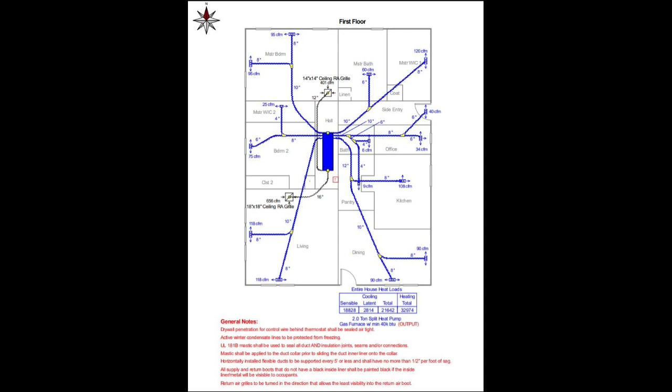Alright, so the third guy just left after talking a little while, and we'll see how it goes. He again agreed with the second one that this duct work was too much, it wouldn't get any flow, and the size was wrong. So let me bring you back to this.

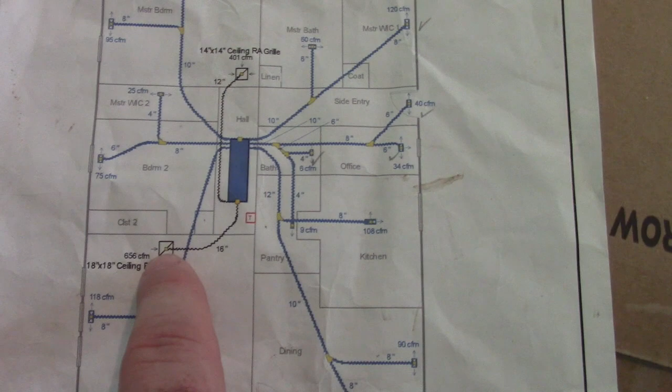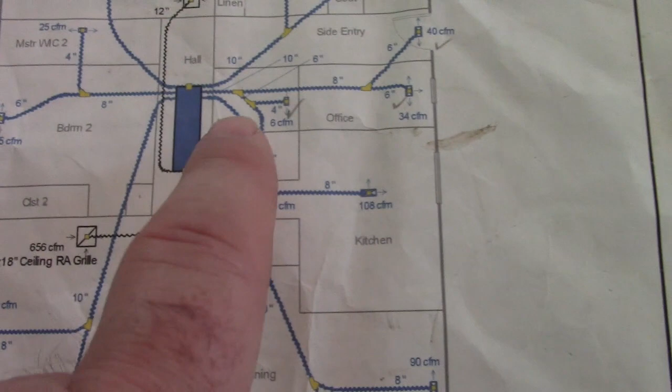Basically this is the layout of the house. I know you can't really see good through this camera, but this is the unit, the heat pump, the air handler. On one side here we have the return, so there's 2 returns, one here and one here. This one I actually moved to the hallway, so it's closer there, and this is going to be center of the house. Then it's got ducts going to every room.

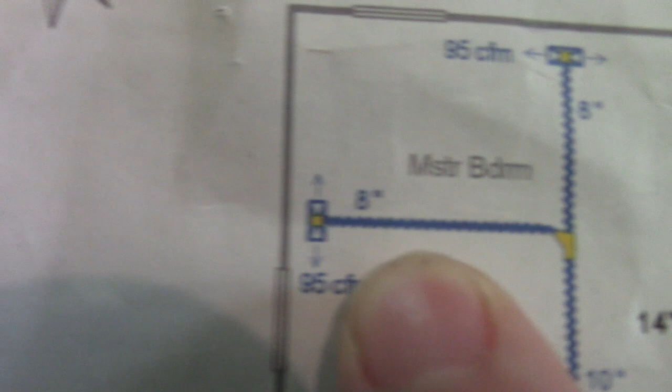And he said these ducts are way too big. This is an 8-inch duct going to a 4-inch, going to a 6-inch. Here's a 10-inch going to two 8-inch. It's got the CFMs right there, 95 CFMs, 95 CFMs, 120 CFMs here.

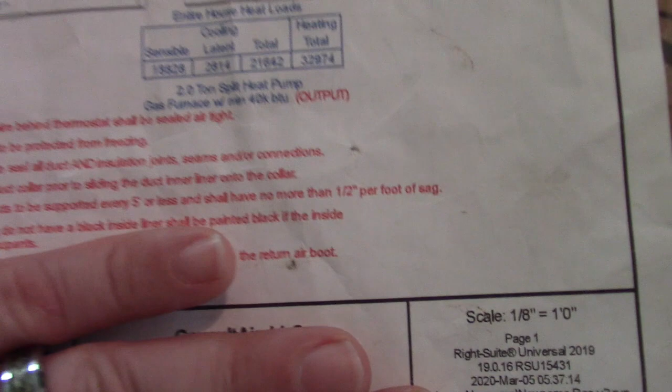The problem is, that's what it's rated for, a 2 ton split heat pump, gas furnace. We decided not to go with the gas furnace. The problem is the 2 ton heat pump only puts out 800 CFMs.

These 8-inch, 10-inch lines, the 8-inch I think is 200 CFMs, the 10-inch is probably 300, whatever. It all adds up to a lot more CFMs than what that heat pump can put out. So you really won't feel any airflow when it's running. I'm guessing you're only going to get so much airflow out, and it's going to suck up so much. You get some flow, but with these tall ceilings, you'd never feel it.

So he thinks at least a 2.5 ton for this house. I want to say this house is 1,600 square feet. I don't think it's on here.

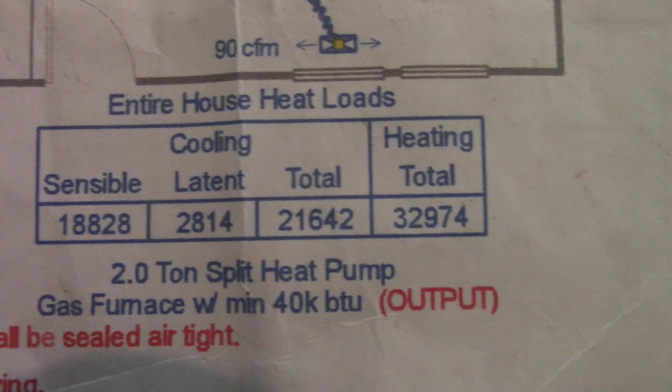There's the heat loads right there, entire house heat loads. Sensible, latent, cooling and heating total 32,000 BTUs, 21,000 cooling and 32,000 BTUs heating. That's the heat loads and the cool loads. So a 2 ton unit is 24,000 BTUs, and you see here a 40,000 BTU minimum furnace would be needed to take care of that heat load.

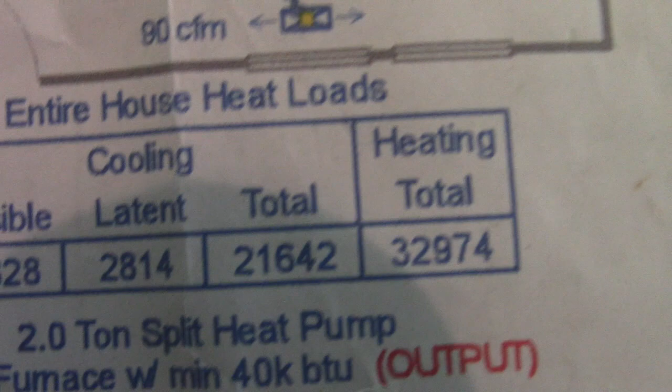I'm not an expert on heating and air. I know these guys, and I asked this last one - I'm not gonna name names because he hasn't got back with me, but he's gonna get back with me in a day or so with a price. I'm not naming any names of whoever I go with.

These guys don't even bother calculating the heating load or cooling load. They've done this stuff so many years - he's been doing it since '77 or '78, and mostly in this area, in the south. He said he used to do all that, but once you do it a thousand times, you figure out, hey, I need this or that for this size house with this much insulation. Typically in the south we oversize our HVAC units, especially the cooling, because we have a lot of humidity down here, not necessarily hot temperatures.

It makes it very hot. If you're dealing with an average of 85 degrees in the summertime, but 75 to 80% humidity, that's a lot of heat. You've got to get that out of the air to cool it off.

So anyway, that's what we're going to do, I guess. We'll see who we go with, A, B, or C. I still haven't made up my mind. I'm thinking it's probably going to be B at this point, because I'm kind of afraid this guy is going to be a little bit on the high side, but we'll see.

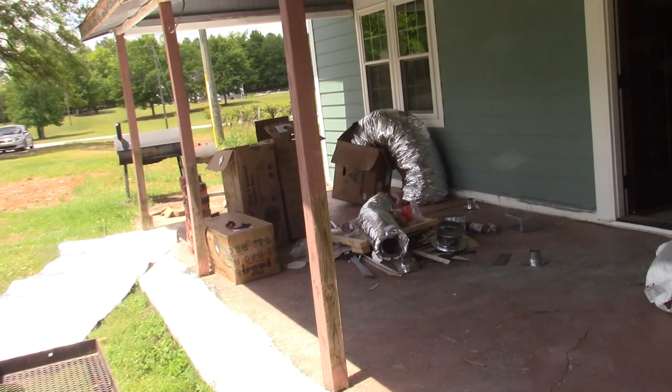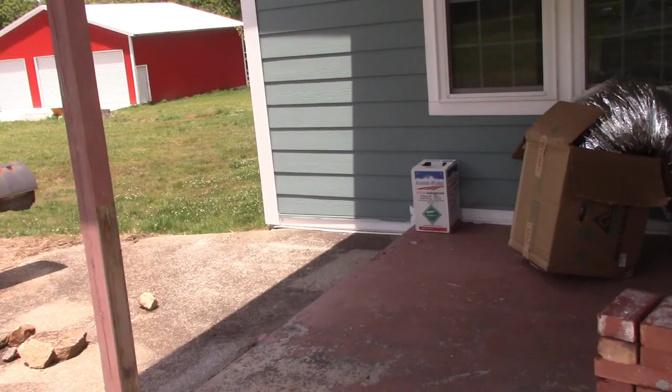So as you can see, we're in day 2 of install. We got a good bit done yesterday for half a day. We didn't show up till about 12. It's about 1 now, so on day 2.

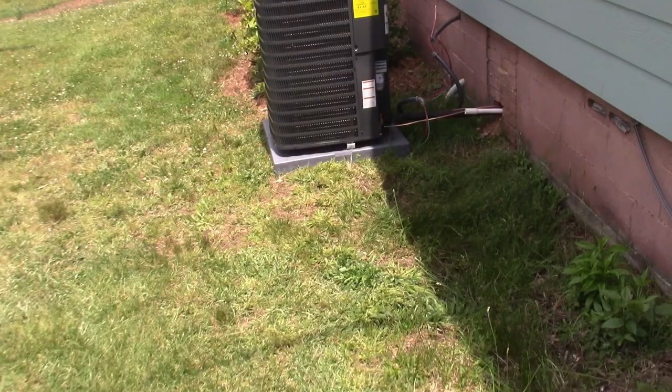But we got the unit set. I think they've already got the line set welded on it. We've still got to wire it up. He's got this to go basically into the disconnect. I've got to put the disconnect on here.

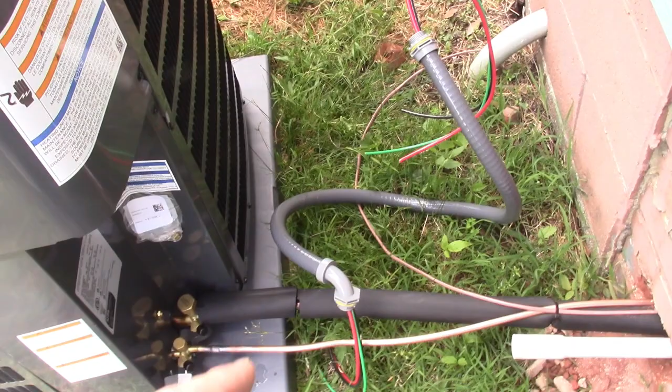Looks like he's got the drain underneath. I told him not to go through the pillars, but I told the wrong person, and the guy that did the work went through the pillars instead of the underpinning. He could have moved over just a little bit and gone through that block there, would have been better, but anyway, it is what it is. It blew out the back of that column pretty good.

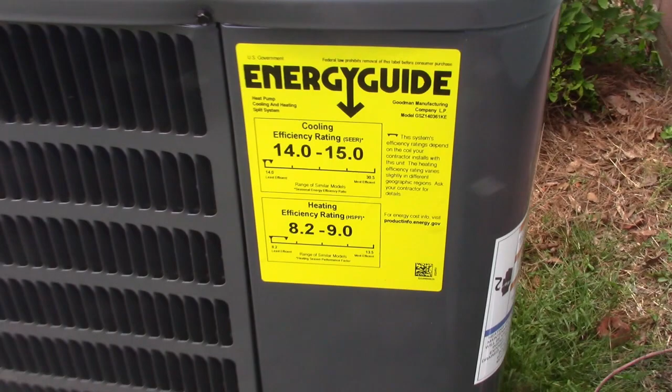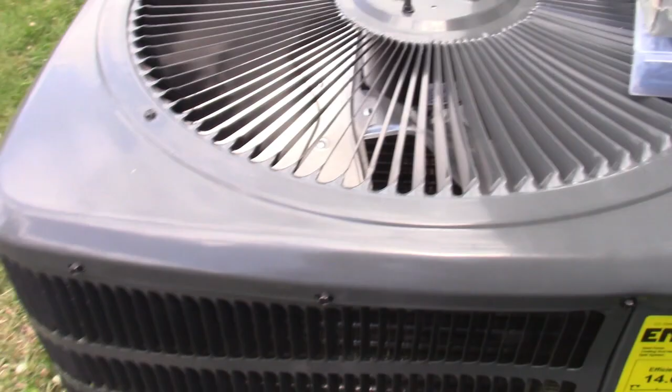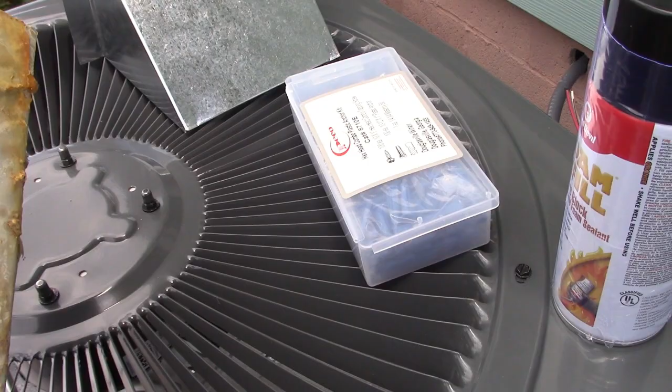This is a Goodman 3-ton. That's the rating on it. It's a 15 SEER, not the best efficiency, but I guess it's going to work. We've got a disconnect right here. I don't know why he went with such a big disconnect. This has been laying on the back of the truck, looks like. He's going to put that on there, I think, to cover up that big hole.

There it is, Goodman. So I got 3 or 4 guys inside working. Look what I see - this is what you don't want to find in the yard after people come to do work, and they leave their little nasty surprises for your lawnmower.

Alright, a couple days later, Sunday. I got done at about 5 o'clock Friday evening. I come in today, and of course it's cool outside. Cooling here at 63, I had it set for 68 on cool. I don't like this thermostat, so it's going to go - adios. I'm going to put a programmable one up there, one that's got automatic heat and cool cycles.

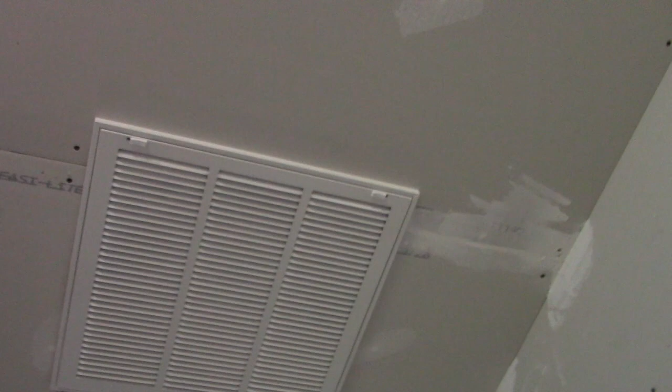So this is it, a 3-ton heat pump. And right here in the hallway, we got a first return. I've got to repair some stuff they did, but it ain't as bad as it could have been, I guess. And here in the master, we got a small return. I think this one is 14 by 14, the other is 18 by 18.

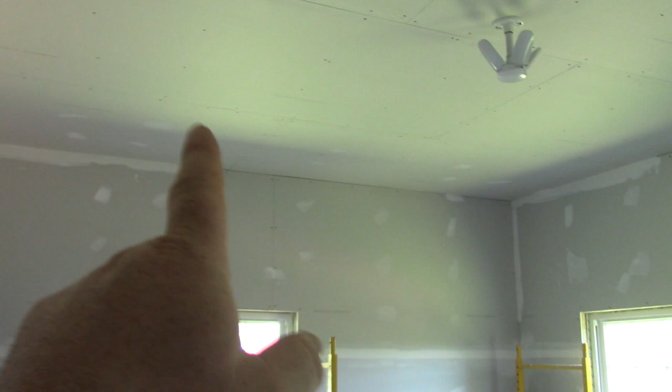The original plan was to have a vent here and a vent here, but we just went with one. And of course the bed will go between the windows there, so we want it over the bed, I guess, where you can feel a little bit of breeze.

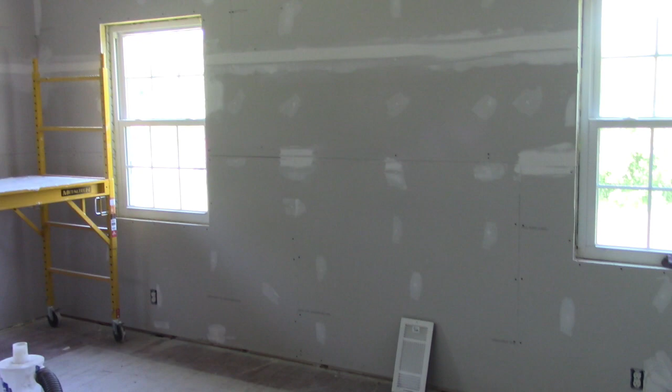And got this one in. And this one in here, they went smaller - this is the closet slash laundry room. Put a smaller one in, so I've got to fill in that little spot right there. And we'll put - got some gaps there. They didn't do a real good job of cutting this stuff out. I already had the wood cut; all they had to do was cut the sheetrock.

They were cutting the sheetrock with a sawzall. Didn't put anything in the closet.

In this hallway, I think they went smaller with it, so here's another one to fix. And in the office they went smaller, so I got that one to fix too. In the bathroom, second bath, they went smaller with it, I think - no, maybe it was already that size. So that's good, I ain't got to fix that.

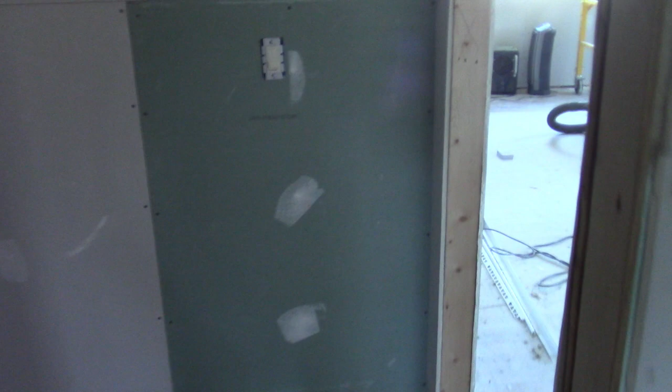I would take you up there in the attic and show you, but it's almost too much trouble.

They also hooked up my 3 bath vent fans, which I haven't even cut out for yet - well, 2 of them I hadn't cut out for. They're up there. So here's another one I had wanted to come back and shorten up, and there's the register for it.

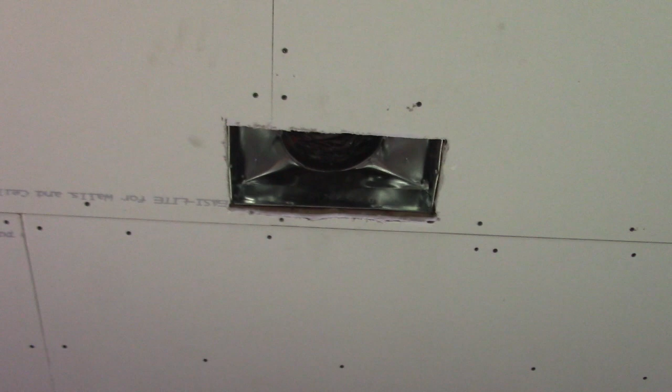Then in the living room, I had 2 cutouts here. We only put this one in, we're going to have to close this one up. So this one fit the hole, so I just put one big one in right here, and there's the register for it.

Then in the kitchen and dining room, we put 2 in because this is going to be the hottest place in the house, so I think these are going to be fitting. Nope, put a small one in here - that's a hell of a small one. So that's a big gap to fill right there.

What I'm going to do is put a piece of wood across, screw it, then put another 3/4 inch piece of plywood up there, screw it to that, and then put some sheetrock in there and screw it to that plywood, because that's sheetrock on top of 3/4 tongue and groove.

This one looks good, I ain't got to fool with it. I think I will come back and paint these black though, just so they don't show so bad.

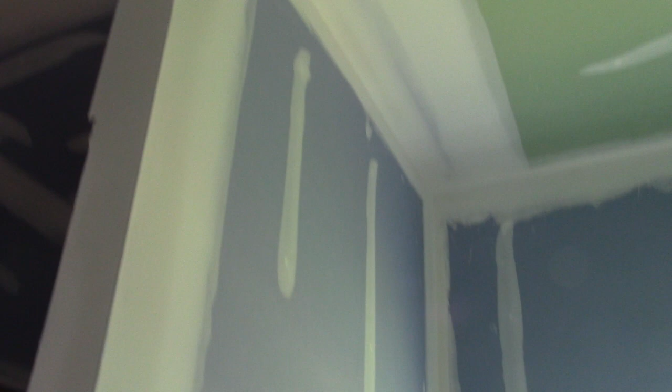You can see behind me, we got some sheetrock mud up. Actually, I hired a guy to come in and do that. Looks like, I've been gone a couple days, looks like he's gotten 2 coats on - got one on the corner, at least 2 on the butts. I can tell that it ain't dried good, that's probably why he ain't here today. It's still a little dark.

Let's see here, got this one done, this one. So you do one day, let it dry, and do the other side another day. He's been here, today's Friday, he started working Wednesday on it.

Man, it's gonna be so nice to get some primer on these walls, get some paint on them, get these windows trimmed out. It's gonna be really good.